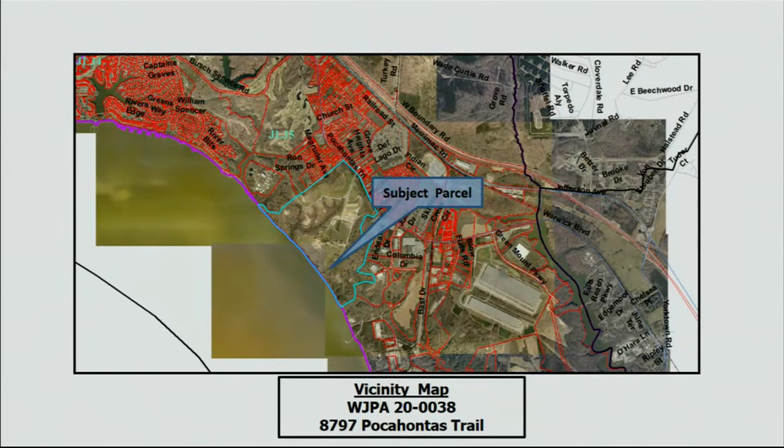Samuel Minkoff of Carter's Grove Associates, LLC, to construct a living shoreline consisting of 12 breakwaters, beach nourishment, backshore plantings, a revetment refurbishment, and a new revetment on property located at 8797 Pocahontas Trail in the Skiffs Creek watershed, as shown above. An aerial photograph of the site in question, right along this shoreline here, with the James River being the body of water it accompanies.

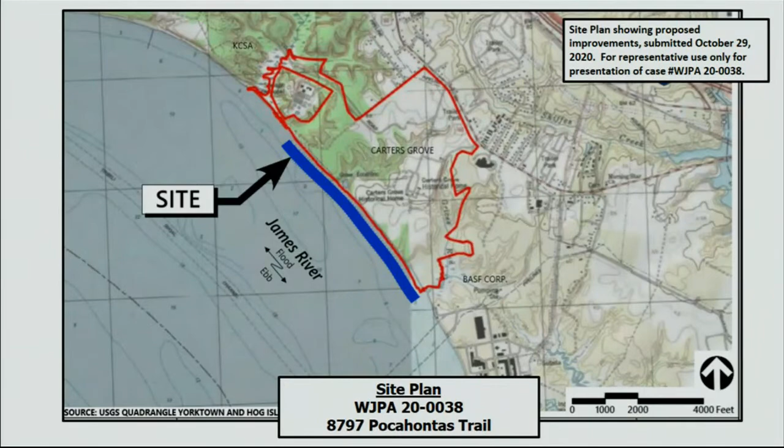Topography as it embodies the site, steep ravines and embankments along the shoreline, and a site plan showing the entirety of the work. The shoreline is characterized by heavily eroded banks caused by offshore wave action. Height of several of the bluffs are estimated at over 50 feet, consistent with Senate Bill 776, enacted on July 1st, 2020. The applicant is proposing a living shoreline approach to protect and restore the property. The project consists of 12 freestanding offshore armored stone breakwaters, as shown above.

A 78,000 cubic yards of sand fill to create 108,754 square feet of sandy intertidal shoreline and 285,595 square feet of vegetated shoreline. Plantings are Spartina patens, salt meadow hay, planted on 18-inch centers.

Upstream from the plantation house is a series of 8 breakwaters, all 175 feet in length, while the downstream segment has two 206-foot, one 200-foot, and one 175-foot breakwaters.

The project also includes the installation of 2 new segments of riprap revetment, 660 feet and 387 feet, and refurbishment of an older revetment for approximately 1,380 feet. Total impacts to non-vegetated intertidal wetlands equates to 108,500 square feet and 240,558 square feet of subaqueous impacts.

The project also includes the installation of an open pile pier, timber pier, 8 feet wide by 832 feet long, and a covered boat lift. The pier crosses non-vegetated wetlands and open water. Both the pier and boat lift are outside the Wetlands Board's jurisdiction.

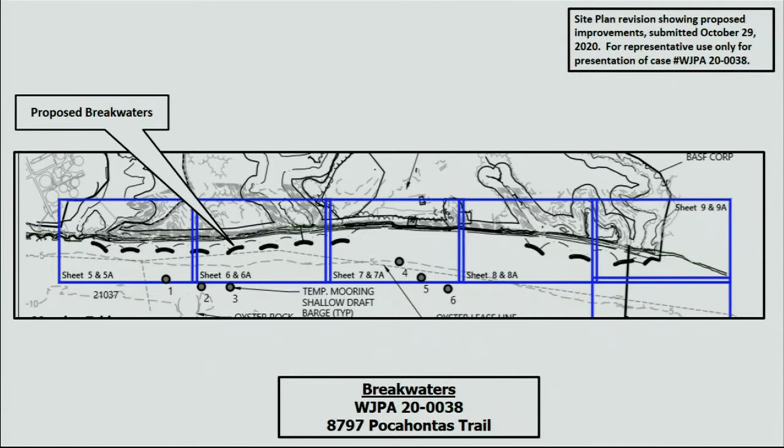In addition, a failed concrete drainage channel located in the center of the existing revetment will be replaced with a pipe outfall, and a failing spillway from a freshwater pond adjacent to the shoreline will be replaced with a spill box and emergency spillway. Above shows a cross-section of the breakwaters being proposed.

A more detailed drawing of the impacted areas shows the revetments here in green, the breakwaters here in yellow, and the sand fill behind the breakwaters here in blue.

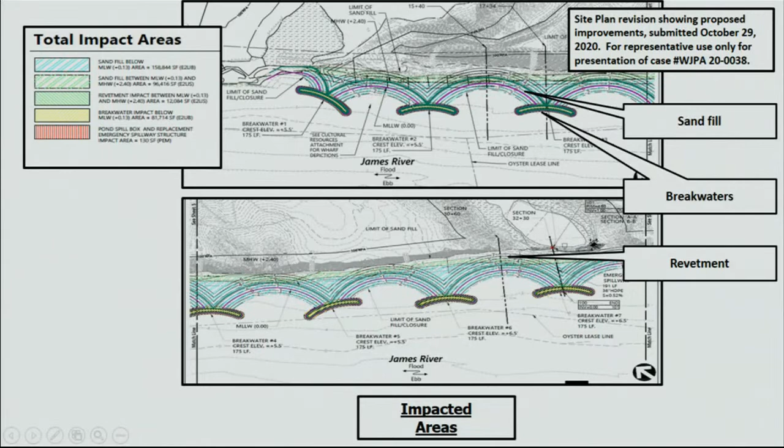The resulting habitat, as it will be affected and that will come of this project, is outlined here in red and blue.

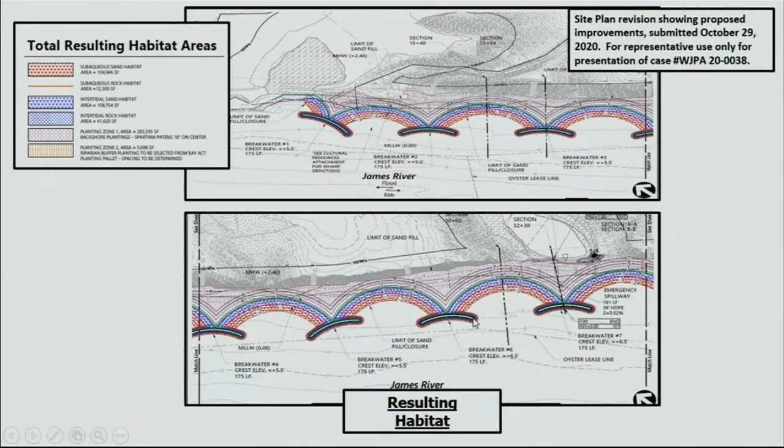As published in the Virginia Register on July 11th, 2005, the revised Wetland Mitigation Compensation Policy and Supplemental Guidelines, Regulation 4 VAC 20-390-10: Virginia, as a Chesapeake Bay program partner, is committed to achieve a no net loss of existing wetland acreage and function according to the program partner's signatories' regulatory programs.

In order for a proposed project to be authorized to impact wetlands and compensate for the wetland loss in some prescribed manner, the following 3 criteria must be met: all reasonable mitigative efforts, including alternative siting which would eliminate or minimize wetland loss or disturbance, must be incorporated in the proposal; the proposal must clearly be water dependent in nature; and the proposal must demonstrate clearly its need to be in the wetlands and its overwhelming public and private benefits.

Staff has reviewed this application and finds that this project does meet all 3 of the criteria as outlined above.

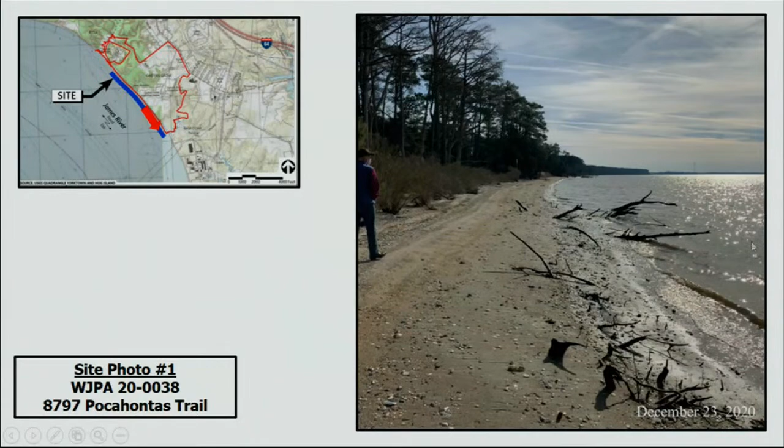Some staff photographs above show the area in question, with breakwaters here in the water and the backfill of sand in this area. Some of the bluffs are eroding, and the applicant is trying to protect them.

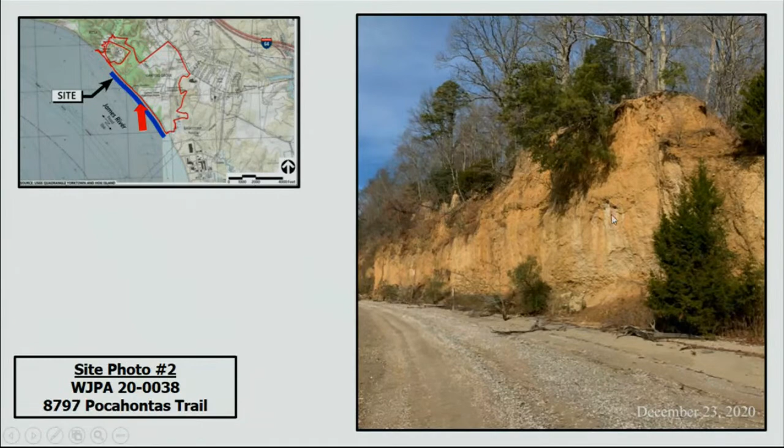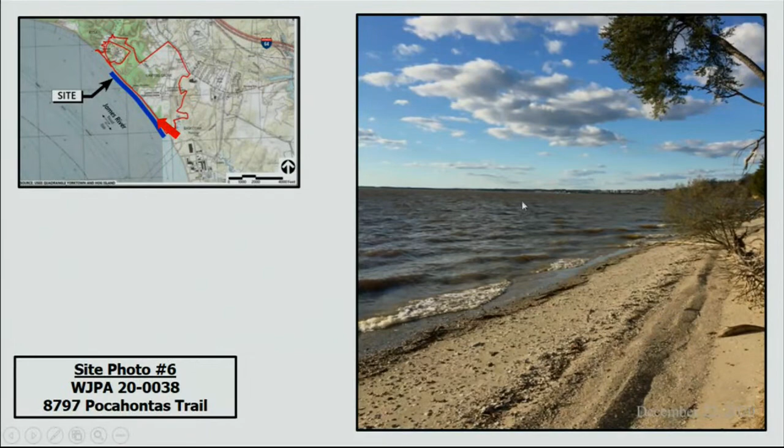Again, the breakwaters being proposed constructed out here in the water, and a few photographs from the water looking in towards the project site.

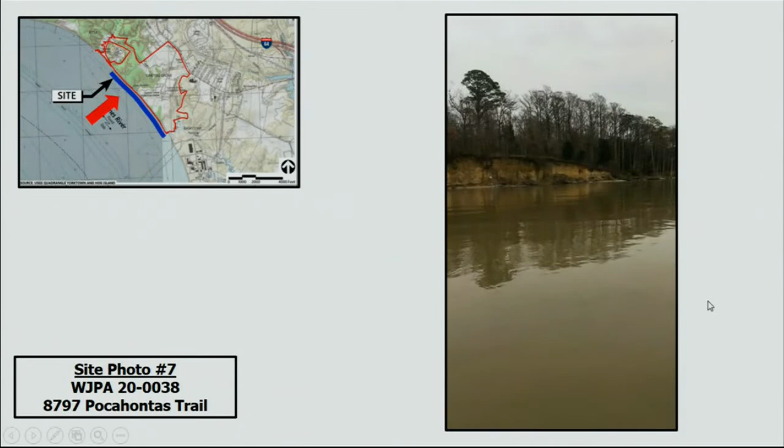Staff has reviewed the application above and recommends approval of this application as presented. Should the board wish to approve the application, staff suggests the following conditions be incorporated into the approval.

The applicant must obtain all other necessary local, state, and/or federal permits required for the project. All development activities located in the special flood hazard area shall comply with Article 6, Division 3, Floodplain Area Regulations of the James City County Zoning Ordinance, and receive all required approval and permits prior to commencement of such activities.

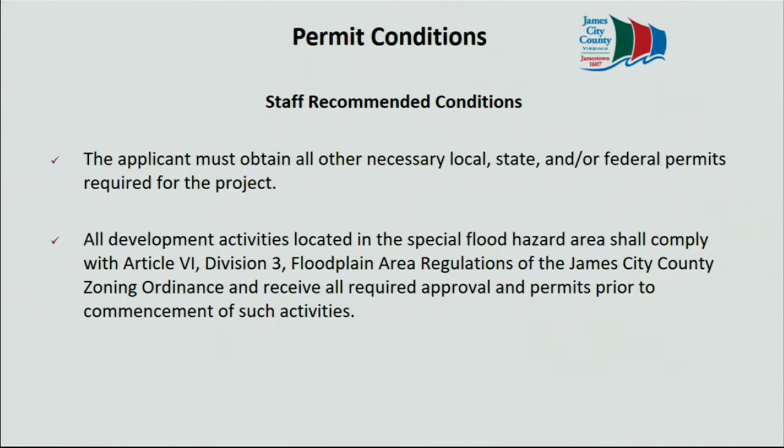The backshore planting area shall be planted with Spartina patens, approximately 285,600 square feet in area, with 2-inch plugs on an 18-inch spacing in a triangular pattern.

A surety in the amount of $20,000 shall be paid and in place prior to the commencement of work, in a form acceptable to the James City County Attorney's Office.

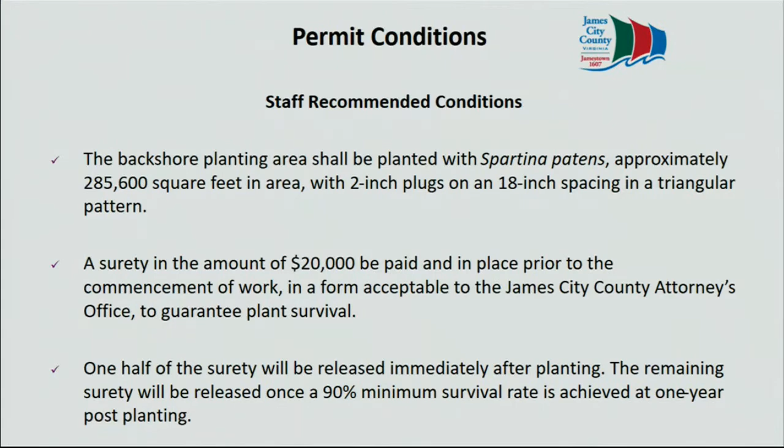One half of the surety will be released immediately after planting, with the remaining surety to be released once a 90% minimum survival rate is achieved at 1 year post-planting.

This wetlands permit for this project shall expire on January 13th, 2022 if construction is not begun, and if extensions to this project are needed, a written request shall be submitted to the Stormwater and Resource Protection Division no later than December 2nd, 2021, which is 6 weeks prior to the expiration date of this permit.

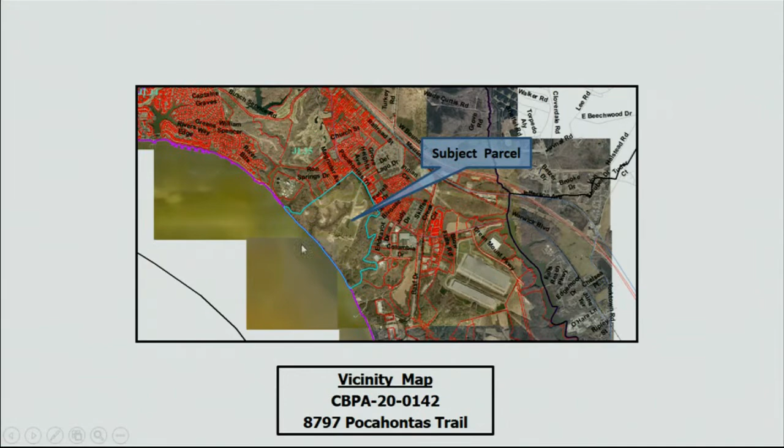Mr. Anthony Lobier of VHB has applied for a Chesapeake Bay exception on behalf of Carter's Grove Associates, LLC, for encroachments into the RPA buffer for the regrading of a ravine, regrading of a shoreline, and the installation of outfall pipes and spillway on property located at 8797 Pocahontas Trail within the Skiffs Creek watershed. As outlined above in the vicinity map, the proposed project site is within the Skiffs Creek watershed along the James River, and here is the approximate location of the proposed project.

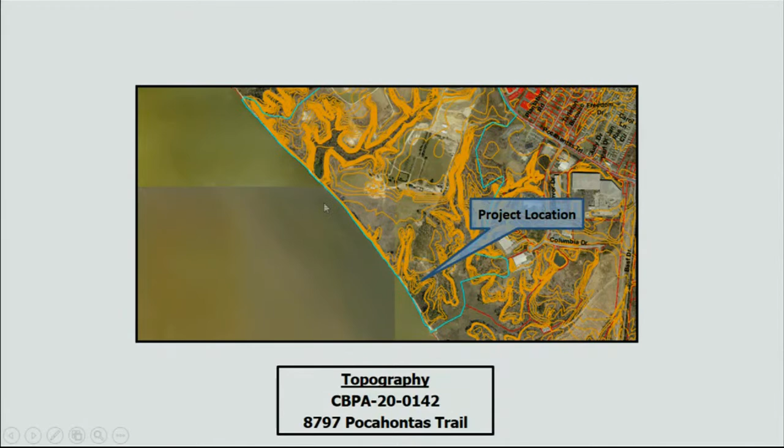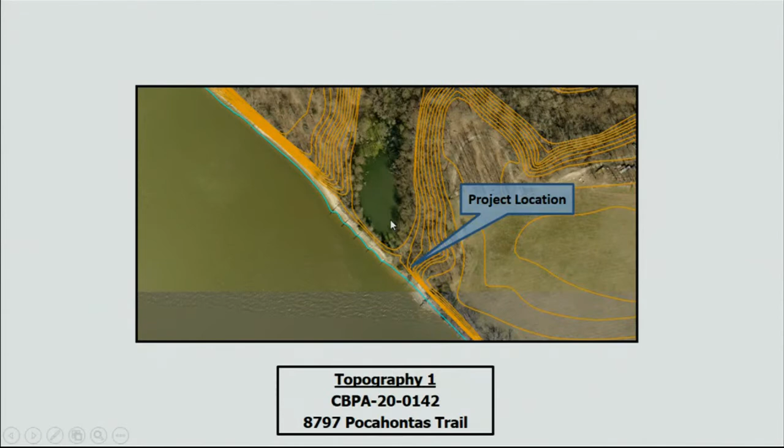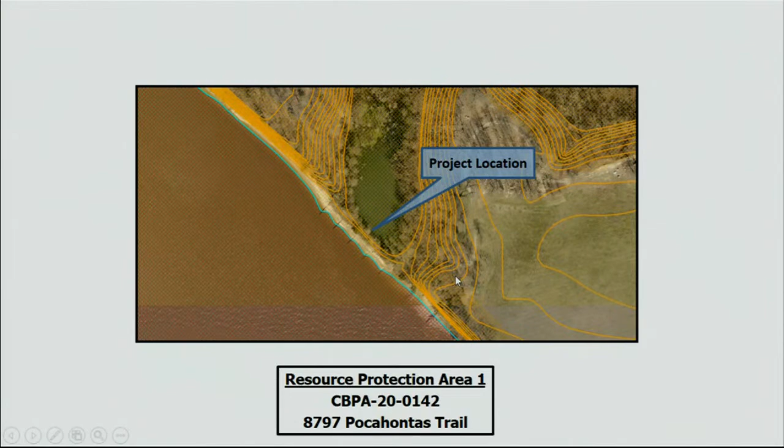Total area involved with this portion of the project equals approximately 15 acres, of which 100% is located within the RPA. The application request is in conjunction with the Wetlands Permit Request, WJPA 20-0038, to protect the James River shoreline bordering this property. The applicant is proposing to regrade the shoreline and a ravine and to install outfall pipes and a spillway to an existing pond. Limits of work are proposed in 3 separate locations and is proposed to run concurrently with the shoreline stabilization projects proposed in WJPA 20-0038.

There are 2 outfall pipes associated with this proposal. One outfall pipe is proposed in a degrading ravine currently transporting runoff towards the resource. The second outfall pipe is associated with an existing pond on site.

Total impacts associated with the proposed project equal 5,182 square feet of impacts to the landward 50-foot RPA and 240,857 square feet of impacts to the seaward 50-foot RPA. Total impervious impacts to the RPA associated with the installation of the pipes and spillway equal 541 square feet. There are also 22,075 square feet of steep slopes proposed to be impacted within this project.

Required mitigation for this amount of impervious cover impact to the RPA equals 1 planting unit, equaling 1 canopy tree, 2 understory trees, and 3 shrubs. However, the entire disturbed area within the RPA must be revegetated with 3 trophic layers—canopy, understory, and shrub—per the ordinance. While no mitigation plan has been submitted at this point, the applicant has expressed intentions of planting in excess of the required mitigation plantings. The applicant must coordinate with the Virginia Department of Forestry for this restoration effort.

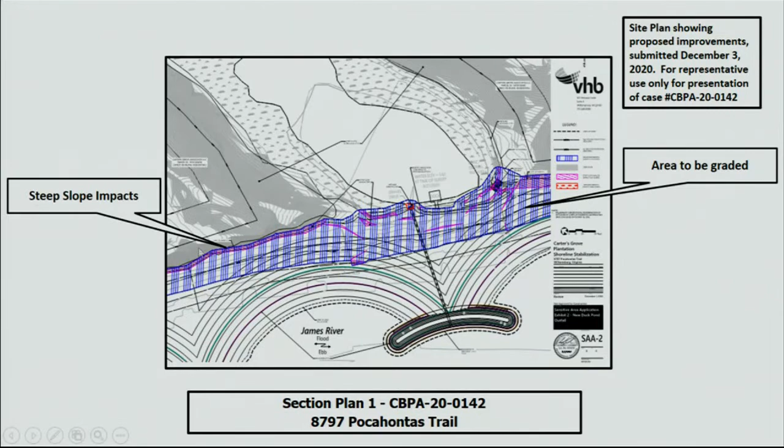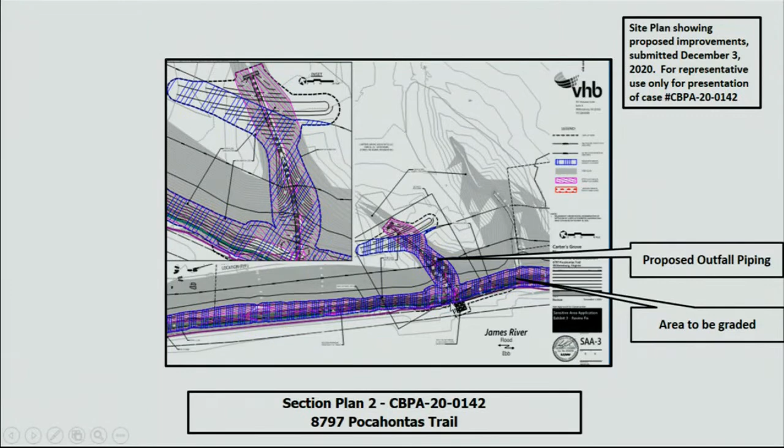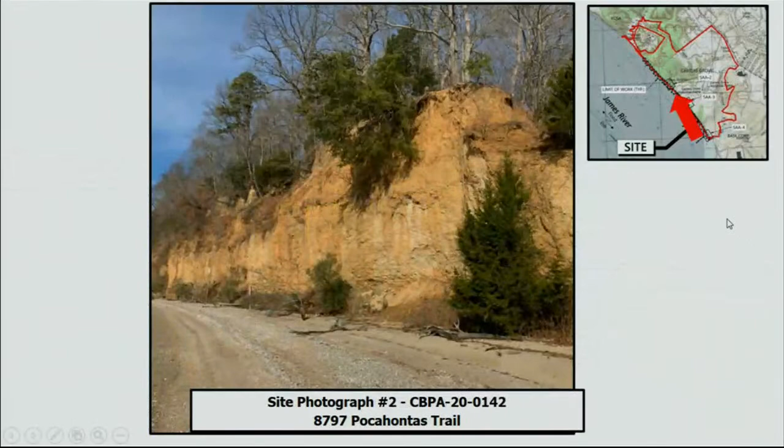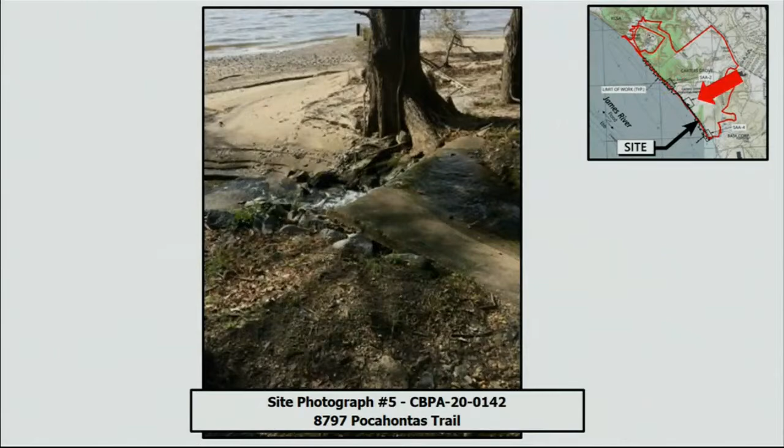Picture showing this from the top view down towards the river, the steepness of the embankments.

Staff's view of this application is that it meets all 5 of the conditions presented in the ordinance. Should the board also find the exception request meets all 5 of the conditions, staff suggests the following conditions be incorporated into the approval.

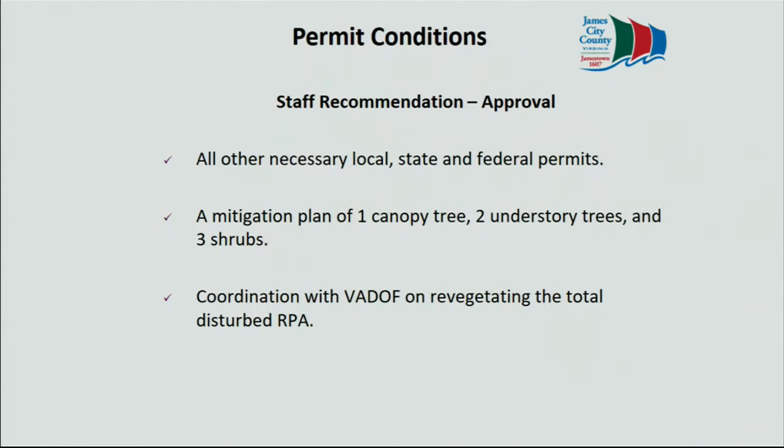The applicant must obtain all other necessary federal, state, and local permits as required for this project, specifically an erosion and sediment control plan and a land disturbance permit. A mitigation plan consisting of 1 canopy tree, 2 understory trees, and 3 shrubs be submitted to the Stormwater and Resource Protection Division, with coordination with the Virginia Department of Forestry on revegetating the total disturbed area, buffer restoration, and trees and shrubs suitable to that location.

That a surety of $20,000 be submitted in a form acceptable to the James City County Attorney's Office to guarantee required plantings of the RPA buffer restoration, and that this exception request approval shall become null and void if construction has not begun by January 13th, 2022, with written requests for an extension submitted to the Stormwater and Resource Protection Division no later than December 2nd, 2021, just 6 weeks prior to the expiration date.

Thank you. I'd be happy to answer any questions the board may have at this time.

Any questions for staff? I have none. Mr. Gussman? No questions. Thank you.

Then I'd like to open the public hearing. Would the applicant care to comment on the application? Neville Reynolds, 5561 Down Creek Road, the agent for Mr. Menkoff and Carter's Grove Associates LLC.

We're in agreement with staff recommendations, and I'm happy to answer any questions.

Gussman: No questions. Just curious, are you able to use any of the bank material for fill for the beach portion? No, in fact, just for clarification, the only bank grading that really is occurring is where the boat dock makes landfall. I think the grading that was referred to in the drawings by staff is really the sand fill that is placed in the RPA but butts up against the embankment.

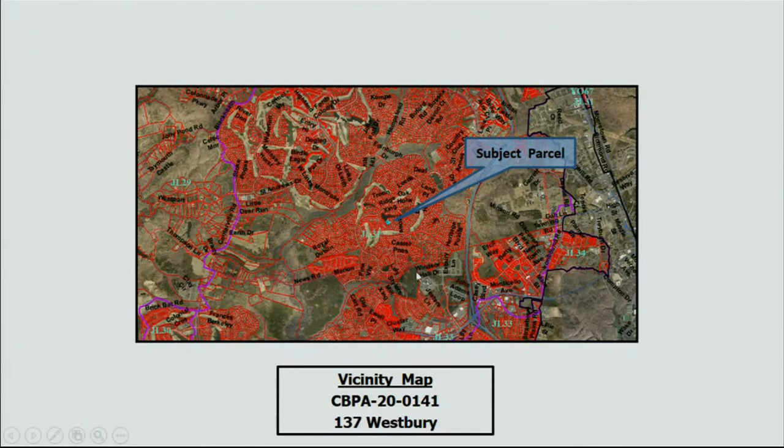The vicinity map here shows the property outlined here, and it backs right up to one of the ponds that's within the Ford's Colony subdivision. Pond is shown here. RPA is based off of the edge of the topography of the site, sloping from the cul-de-sac at Westbury all the way down to the pond.

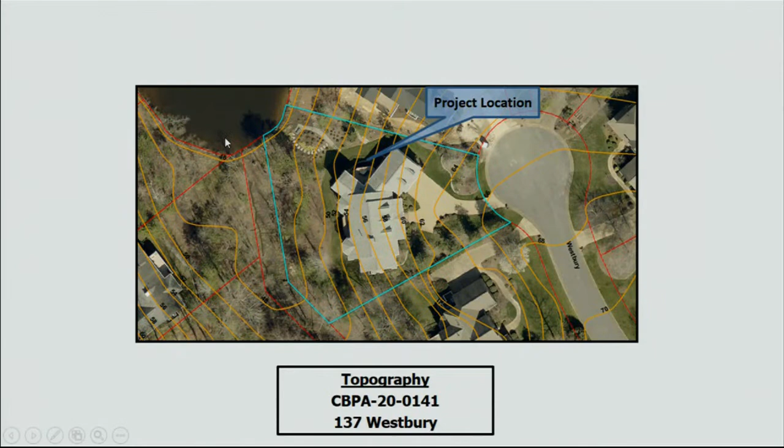There is a sanitary sewer out there. It runs along the property, edge of the pond. RPA as it affects this property borders the house, existing house structures in the RPA. There's a wetland system that comes up this way and affects this part of the property as well.

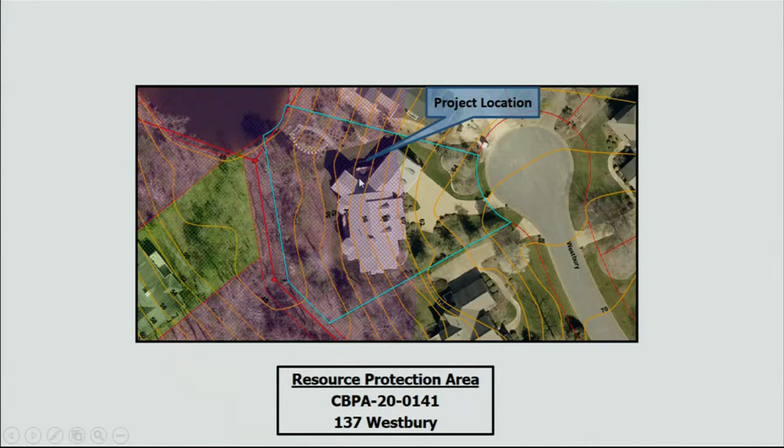A couple photographs of the site. When the original deck was constructed, it was constructed with a 45-degree angle, and the applicants are proposing to square that off and make the deck more usable for them.

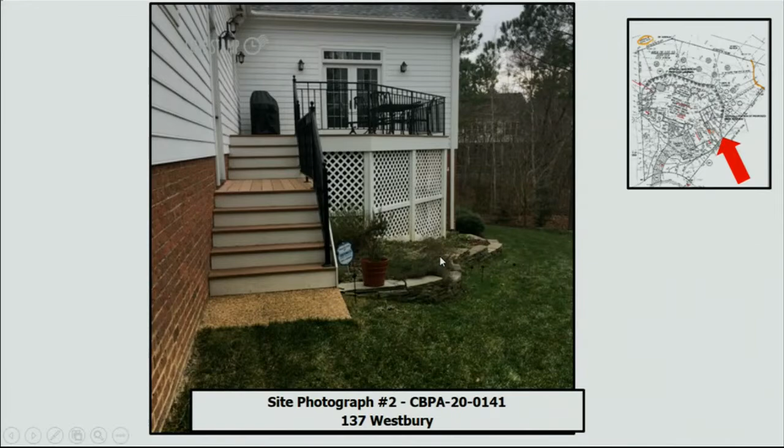All of that. Staff has evaluated this application and the exception request for the construction of this deck extension. It feels that the exception does meet the conditions outlined in the ordinance and should be heard before the board because the deck is accessory in nature.

The board may grant exceptions to Section 23(7) if the application meets the following 5 conditions: that the exception request is the minimum necessary to afford relief, that granting the exception will not confer upon the applicants any special privileges denied by Chapter 23 Chesapeake Bay Preservation of the James City County Code to other property owners similarly situated in the vicinity. The exception request will be in harmony with the purpose and intent of Chapter 23 of the James City County Code and is not of substantial detriment to water quality.

The exception request is not based on conditions or circumstances that are self-created or self-imposed, nor does the request arise from conditions or circumstances either permitted or non-conforming that are related to adjacent parcels, and that reasonable and appropriate conditions are imposed which will prevent the exception request from causing a degradation of water quality.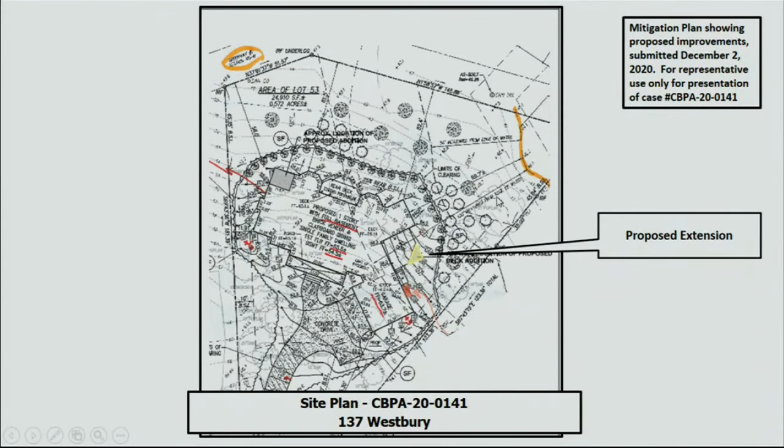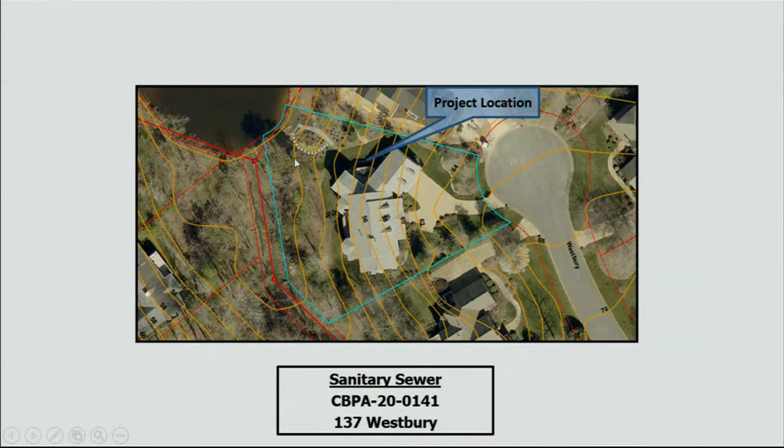I was remiss in outlining their mitigation proposal. Look at the aerial photograph. This entire portion of the property is in a planting bed, and the applicants have proposed to add additional shrubs in this area that would survive those wet conditions.

Staff is in agreement that the application does meet all 5 of the conditions that I outlined, and it is approvable.

Should the board also find that the exception request meets all 5 of the conditions above, staff does suggest the following conditions be incorporated into that approval: that the applicant obtain any other necessary federal, state, and local permits as required for the project. This would entail building permits.

The mitigation plan consisting of 3 shrubs be submitted to the Stormwater and Resource Protection Division. That a surety of $250 be submitted in a form acceptable to the county attorney's office to guarantee the plantings.

That the exception request approval shall become null and void if construction is not begun by January 13th, 2022, and the written request for extension should be submitted to our office no later than December 2nd, 2021.

I'd be happy to answer any questions the board may have regarding this application. Questions for staff? Mr. Gussman? No questions.

I'd like to open the public hearing. Would the applicant care to address the board?

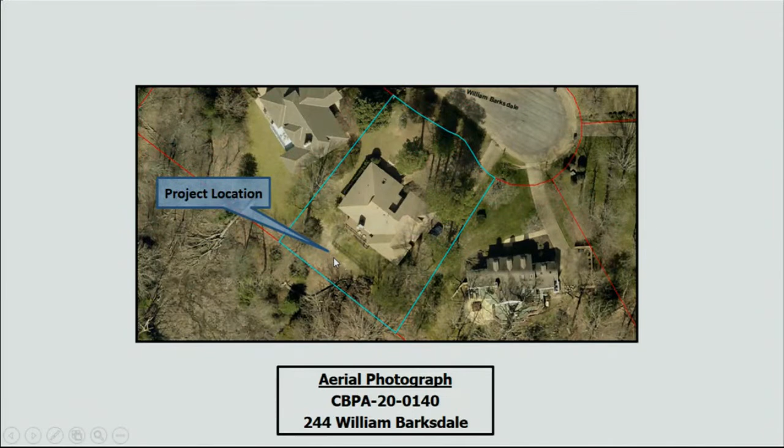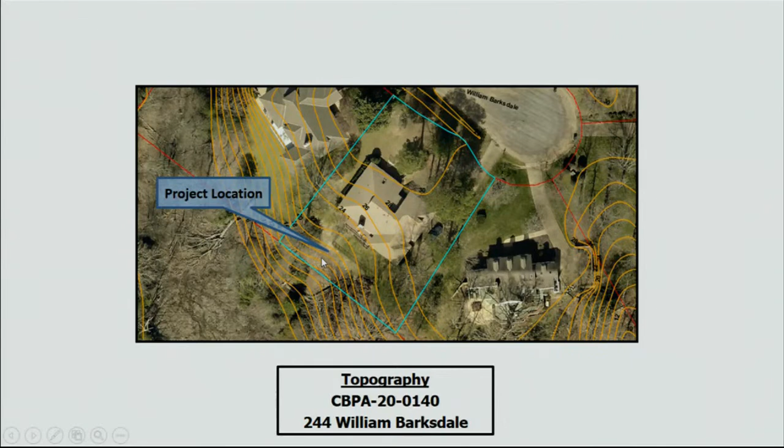Barksdale is in the Kings Mill subdivision, located here, right close to the James Colonial Parkway. Project location in the back of the property. Topography of the site, sloping from the cul-de-sac down to the ravine here at the left of this photograph, and the slopes are steep and eroding in this area.

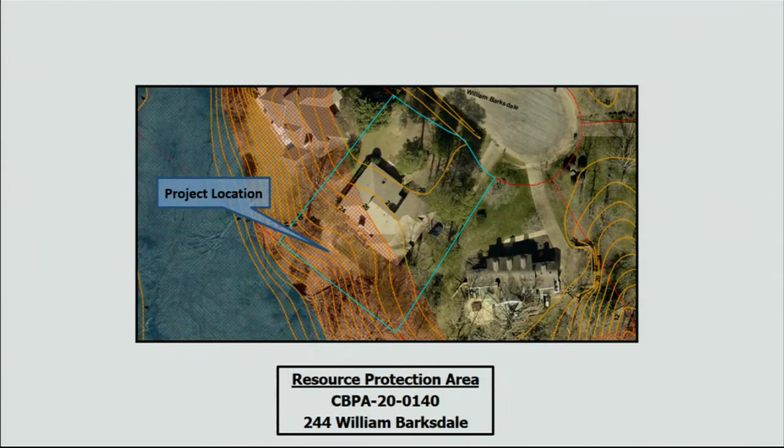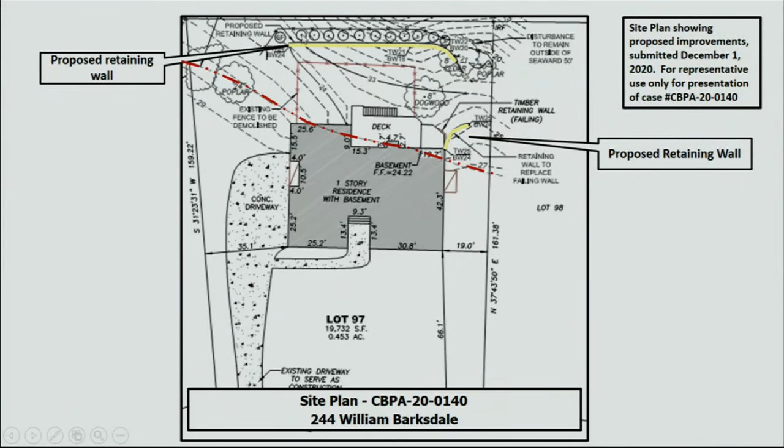From the site plan, they are proposing 2 retaining walls - one here, the first one in the back, and the second one on the side of the house, a smaller wall. Then for mitigation, they're proposing 11 shrubs below the long retaining wall at the rear of the 100-foot RPA buffer as it affects this property.

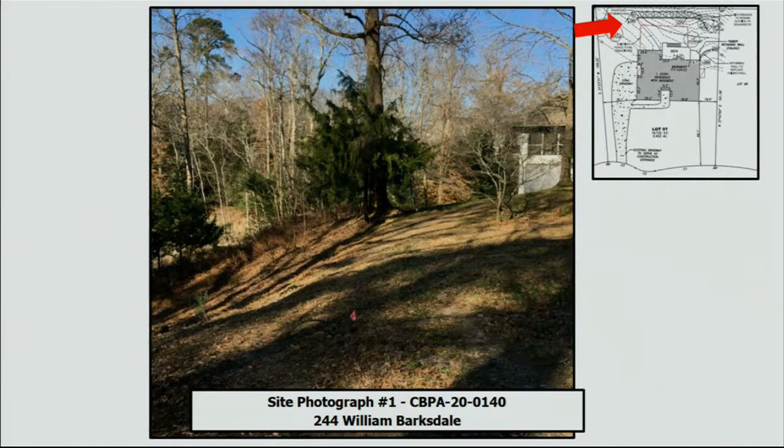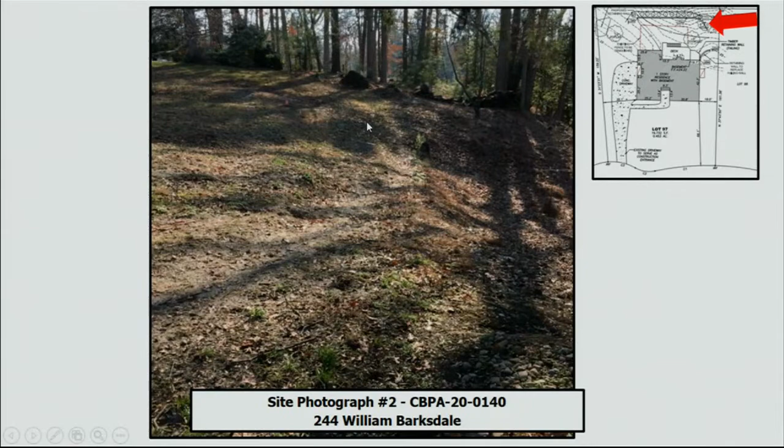A couple photographs from the site. Looking from the left-hand side of the property, the wetlands off to the left, you can see the steep slope nature of the property there. On the other side of the property, retaining wall in this location, mitigation plantings down here.

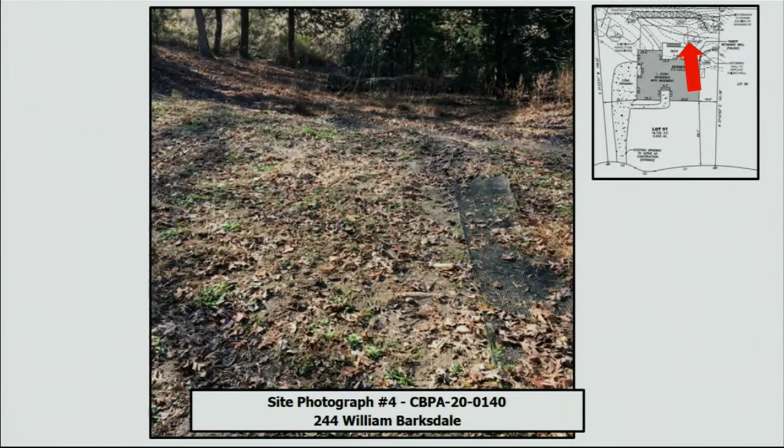From the house looking back towards where the retaining wall would be built, and the smaller wall up at the house in this location here.

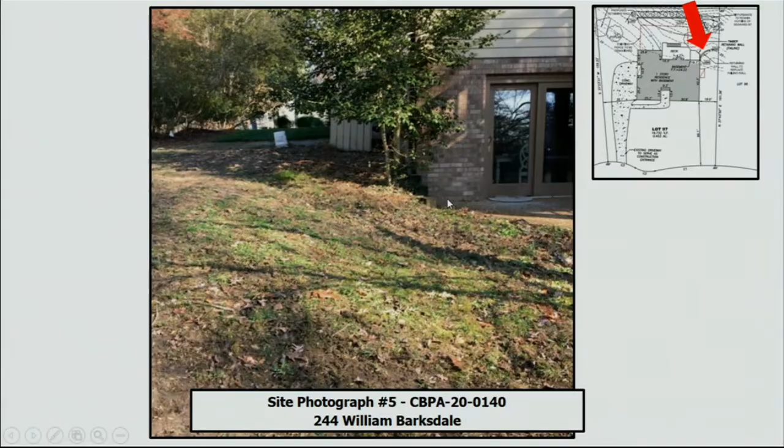Staff evaluated this application and the exception request for the construction of these 2 retaining walls and feels that it meets the ordinance conditions in 23.11 and 23.14, and should be heard before the board because the retaining walls are accessory in nature. The board may grant exceptions to 23.7 of the code if the application meets the following 5 conditions.

The exception request is the minimum necessary to afford relief; granting the exception will not confer upon the applicant any special privileges denied to others under the chapter; the exception request will be in harmony and purpose with the Chesapeake Bay Ordinance, Chapter 23 of the Code, and is not of substantial detriment to water quality; the exception request is not based on conditions or circumstances that are self-created or self-imposed; and that reasonable and appropriate conditions are imposed which will prevent the exception request from causing a degradation of water quality.

Staff's view is that it does meet all 5 of those conditions as presented and is approvable. Should the board also find the exception request meets all 5 of those conditions, staff suggests the following conditions be incorporated into that approval.

That the applicant obtain any other necessary federal, state, and local permits as required for the project, including a James City County building permit. That a surety of $250 be paid and in place prior to commencement of work, in a form acceptable to the James City County Attorney's Office, for the planting mitigation, which again is 11 shrubs.

This is a stacked block wall? Yes. And then the wall up near the house is basically replacing the timber wall that's up there that's failing. It seemed logical to go ahead and replace that little wall.

The mitigation, we're going to do 11 shrubs down below the wall. That seems to work pretty well, and that will stabilize the ground below the wall. We found that works very well—a simple design, but it seemed that's usually what works.

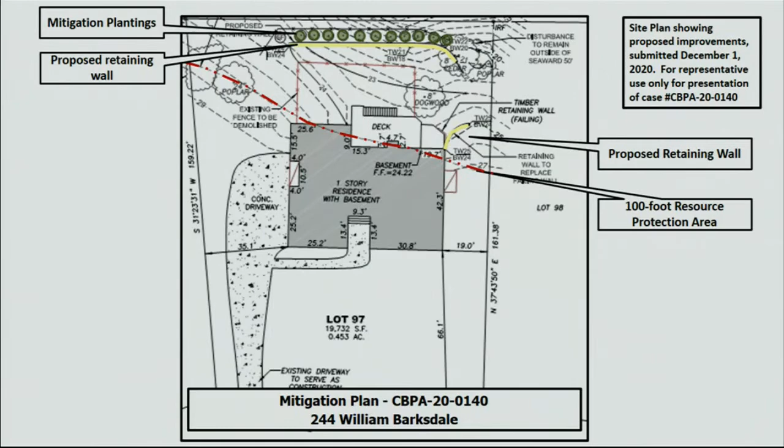Any other questions for the applicant? How is that retaining wall going to be? It's only going to be about a 4-foot wall. Going to have still a slope? There will still be a slope coming down the hillside, and they'll restabilize the hill and grass just like it is now.

Provisions for catching that water, or is it going over? It'll be gravel behind the wall, so a lot of it will infiltrate behind the wall and go down there, coming out the weep holes at the bottom for anything that doesn't continue to infiltrate straight down. When we were out there, we did a couple soil augers—it's a pretty sandy loam material, so it's got a good chance of doing some pretty good infiltration there, still well above the groundwater table down toward College Creek.

Mr. Gussman, Mr. Lukens, any questions of the applicant? No questions. Thank you. Would anybody else care to comment on this application? Michael Hoyt, Barksdale—I'm a homeowner here with Catherine, just here to answer any questions you might have. Any questions for the applicant? Very good, thank you for coming.

If there are no other comments, I will close the public hearing. Board discussion.

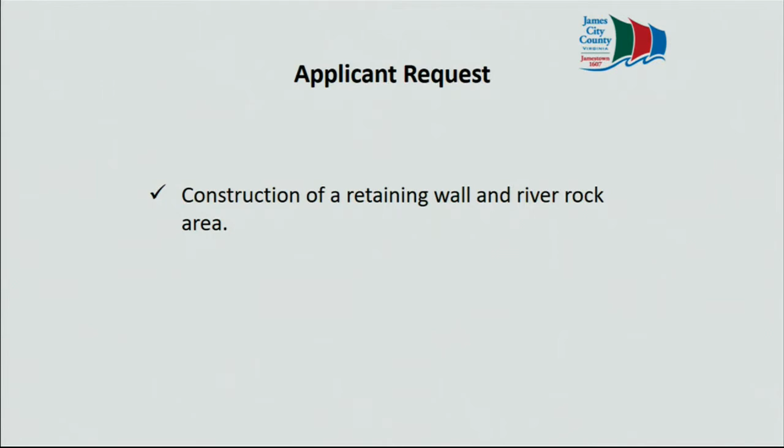Chair, members of the board, again, Mike Wilson here to present case CBPA 20-0100, Mr. Emmanuel Greenspan at 5520 North Mallard Run, and Mr. Aaron Williams of Williams Landscape Design as well. He is proposing the construction of a retaining wall and then a river rock area to address erosion of his property.

His property is located in the Mallard Hill subdivision, off the main entrance into the Warhill District Park off Longhill Road. If you're familiar with that, going into the park, there's a subdivision off to the right—these are the soccer fields, the complex is up here, and the county football Warhill Stadium is up there. In the aerial photograph, the project location is in this general area here.

Topography of the site: a high point near the cul-de-sac at the bottom of the page, then deeply sloping down towards the Powhatan Creek floodplain. The floodplain is shown here—it is a designated floodway, and it shows up on the FEMA maps. The elevation of that floodplain is approximately 43 feet mean sea level, shown in this green area here.

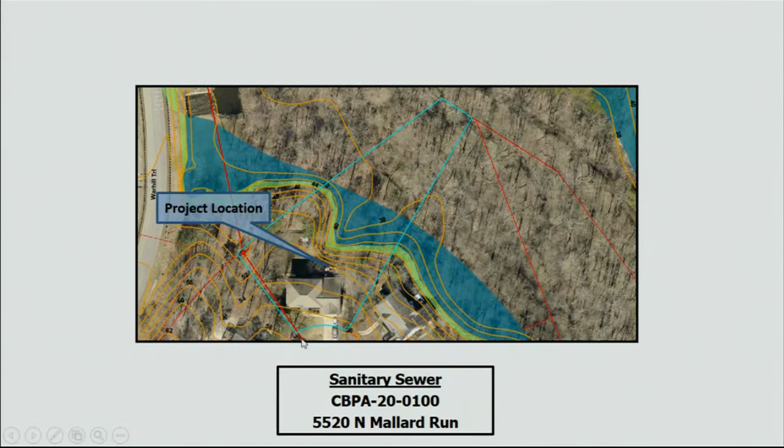Sanitary sewers that affect the property, but not the project, shown in this location, and then cutting across, going up into the Warhill Sports Complex. RPA as it affects this property.

The amount of impervious cover proposed with the construction of the retaining wall in the river rock area is approximately 693 square feet. The property was platted in 1991, after the adoption of the Chesapeake Bay Ordinance, but prior to the 2004 revisions.

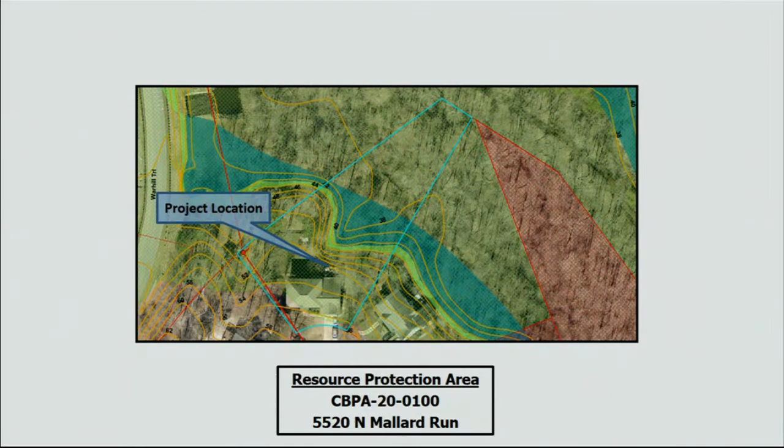There is erosion occurring on the back half of the property in this area. For that reason, the applicant is proposing a retaining wall as shown on the site plan. They're also proposing to fill the area between the house and the retaining wall with river rock in order to provide further stabilization, as shown.

Total impacts to the RPA are just less than 700 square feet, at 693 square feet. The required mitigation for this amount of impervious cover equals 2 mitigation units, which is 2 canopy trees, 4 understory trees, and 6 shrubs.

The mitigation plan is proposed downstream of the retaining wall, similar to the last project. Staff has evaluated this application and the exception request for construction of the retaining wall and the river rock area. The application does meet the ordinance conditions in sections 23.11 and 23.14 and should be heard by the board because the retaining wall and river rock area are considered accessory in nature.

The board may grant exceptions to 23.7 of the James City County Code if the application meets the following 5 conditions: that the exception request is the minimum necessary to afford relief; that granting the exception will not confer upon the applicant any special privileges denied by Chapter 23 to other property owners; that the exception request will be in harmony with the purpose and intent of Chapter 23 and is not a substantial detriment to water quality;

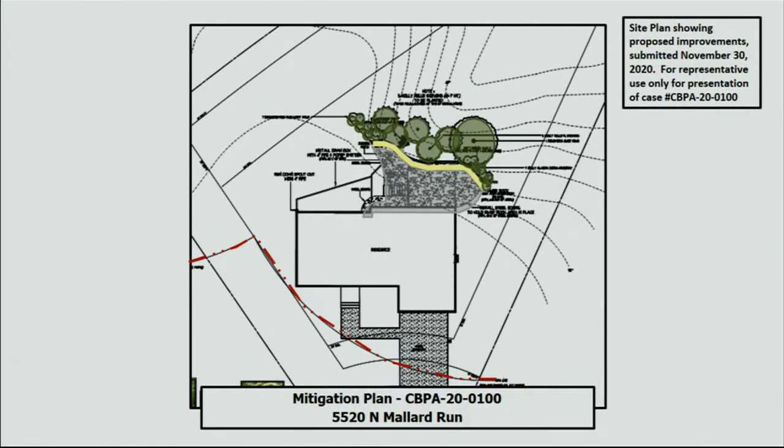that the exception request is not based on conditions or circumstances that are self-created or self-imposed, nor does the request arise from conditions or circumstances either permitted or non-conforming related to adjacent parcels; and that reasonable and appropriate conditions are imposed which will prevent the exception request from causing a degradation of water quality. Staff does feel that it meets all 5 of those conditions and recommends approval.

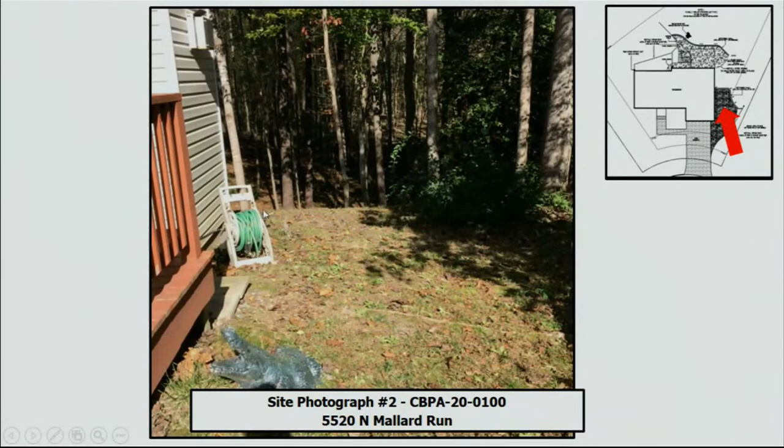A couple of site photographs of the area. This is off to the left here, that is the Powhatan Creek floodway. The retaining wall is going to be in this area, and then this area would be... And the retaining wall is in the back of the house here. This would be part of the area proposed to be river rocked.

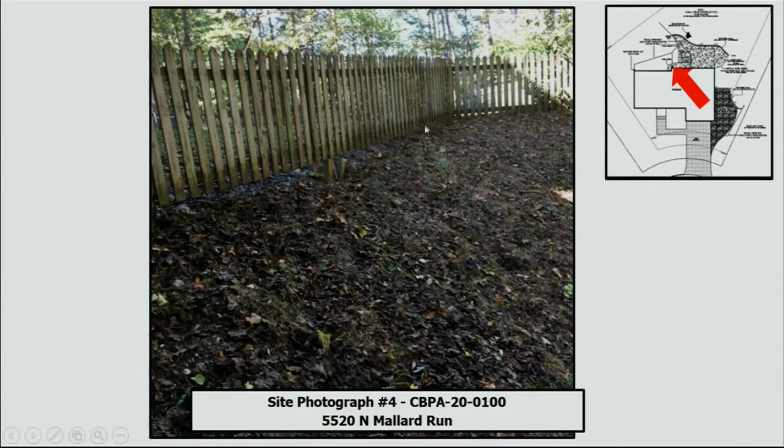Staff finds that this case is approvable, and should the board find that the exception request meets all 5 of the conditions previously mentioned, the following conditions be incorporated into that approval.

All other necessary local, state, and federal permits be obtained. This does require a James City County building permit; to date, they have applied for one. There are outstanding comments related to floodplain elevation location. The retaining wall, number 2, may not be built within the Powhatan Creek floodway as shown.

That a surety of $1,000 be paid and in place prior to the commencement of work, in a form acceptable to the James City County Attorney's Office. That the exception request become null and void if construction is not begun by January 13, 2022, and that written request for extension be submitted no later than December 2nd, 2021. Happy to answer any questions the board may have on the application.

Mr. Wilson, stop right there. Back up. So those are the pilings supporting the deck in the back? Correct. The approximate location of the retaining wall relative to the pilings? Just off the photograph. Is that a cantilever deck? I can't remember, I will let...

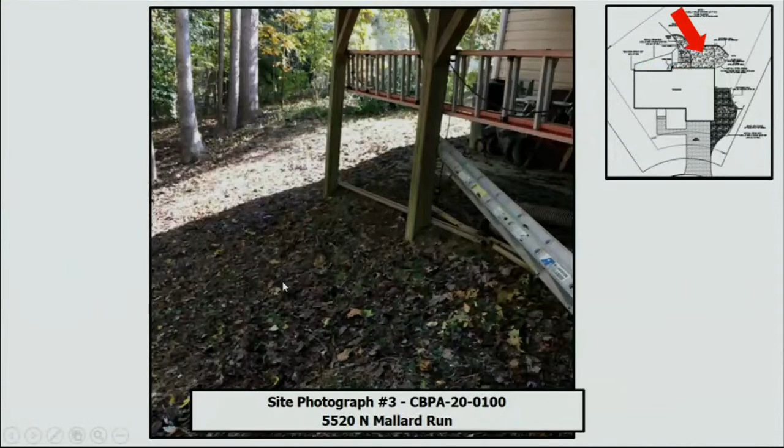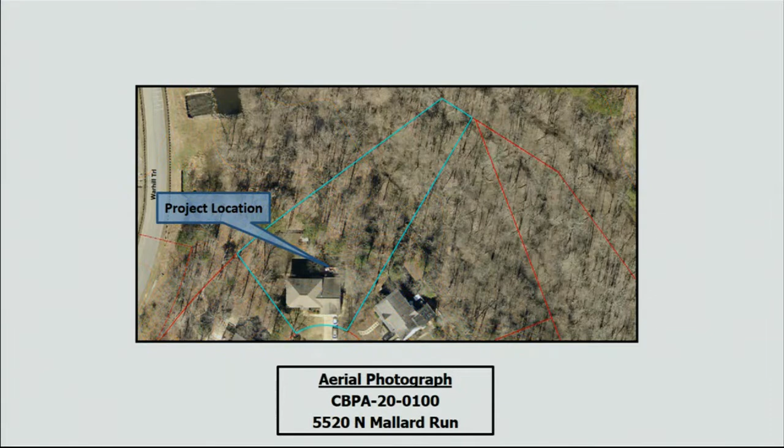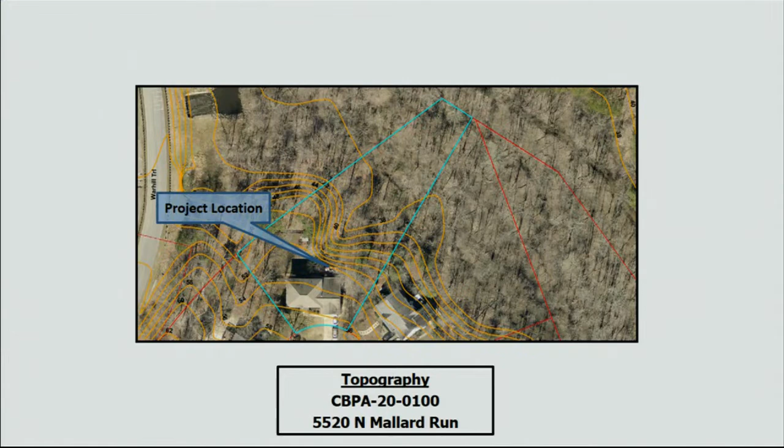One of the issues that our building permit and safety division is having is that the site plan that was submitted did not show any topography. From the FEMA map, the floodplain elevation is just less than 43, and these are 2-foot contour intervals.

So the floodplain elevation is roughly halfway between 42 and 44, shown there in green. So the deck is here, those trees we were looking at in that one photograph are here, and that retaining wall is going to be on the house side of those beech trees.

If I have that wrong, Mr. Williams will let me know. Any other questions from staff? Mr. Lukens and Mr. Gussman? No questions.

Questions here, Bob Lukens. I guess for clarification for me, the FEMA map area there showing the floodplain, does that represent a specific percentage of annual inundation?

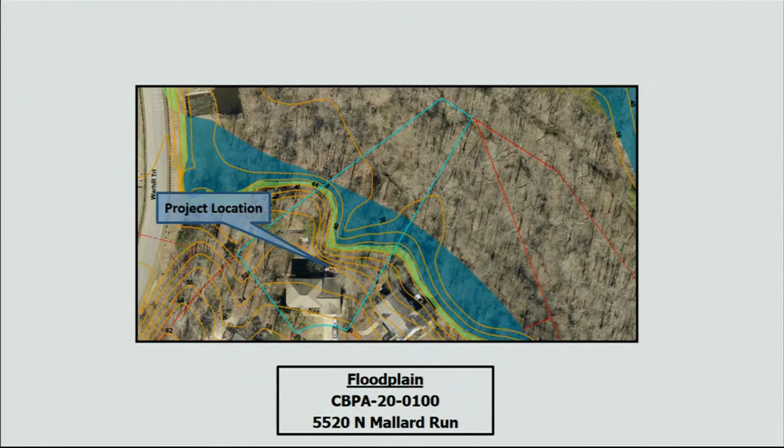Another question, the use of the river rock there, that will basically be a surface spread of a couple inches to slow down water flow ahead of the retaining wall. Yes, to slow down water, to allow it to infiltrate, and more importantly, to stop erosion that the applicant is currently experiencing.

This stabilization technique — the backyard is rather densely canopied. It's hard to tell at this time of year how much sunlight it gets in the summertime to grow healthy grass. But my suggestion to the board is there's not a lot of sunlight reaching the backyard in the summertime. That's why they're having difficulties getting grass to establish.

Very good. Any other questions of staff?

I'd like to open the public hearing for comments. Anyone wish to address the board?

Hi, my name is Aaron Williams. Can I take this off? Okay, thanks. Aaron Williams, representing Mr. Greenspan. I'm with Williams Landscaping.

Mike explained pretty much everything that I would have said, but I can answer any further questions. I noticed on your drawings that the location of the retaining wall in the vicinity of the deck appeared to be less than 5 feet off of the edge of the deck, closer to those pilings, unless the deck's cantilevered. Yeah, it is cantilevered. Okay. So our objective was to stay inside of or right at the footprint of the deck above, so that we don't go any further than has already been disturbed, but far enough away from the pilings so that we can put in the geogrid, which helps stabilize the wall.

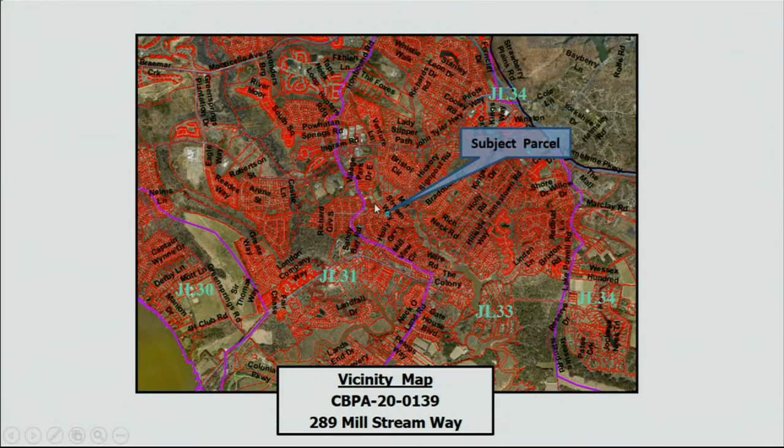The application again is for the construction of a patio, 2 retaining walls, a step with landing, and also a deck. The property is located in Millstream subdivision, right here, with Hickory Signpost Road right behind this property. Project location shown here. Topography as it affects this property — again, sloping from the street towards the rear of the property.

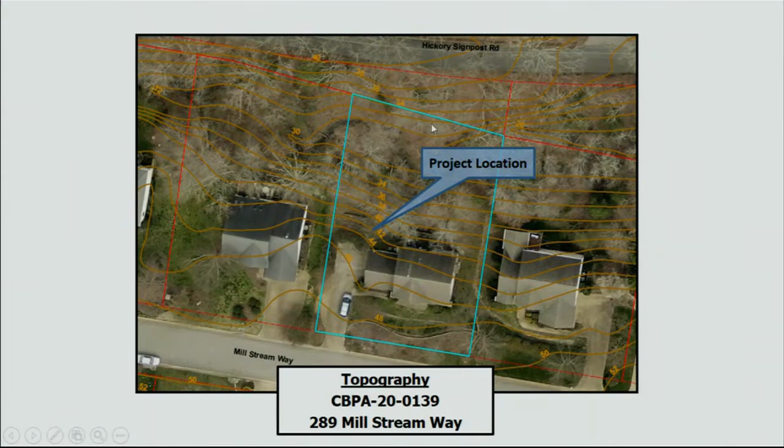If you remember, there is a live stream on the property at the rear. It's an RPA on the entire property. The parcel was platted in 1995, prior to the 2004 revisions, which is where this RPA is derived from. The amount of impervious cover that the Potters are now proposing is slightly less than 500 square feet, at 492 square feet.

In June of 2020, the applicants obtained an administrative exception to convert a deck into a house addition. A separate application was later submitted for the construction of a patio, 3 retaining walls, deck, and steps with landings. This application was deferred at the October 14, 2020 meeting to allow the applicant to adjust some things to the plan. The application was then heard at the November 11, 2020 meeting, where it was subsequently denied.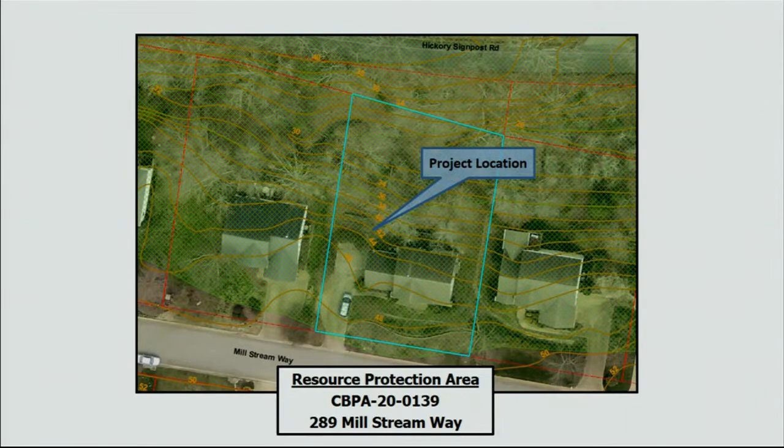The applicants have now amended that site plan to reduce the impervious cover impacts to the RPA. The proposal now includes the construction of a patio, 2 retaining walls, a deck, and steps, equaling approximately 492 square feet. The plan denied at the November meeting equaled approximately 830 square feet of impacts to the RPA. They have reduced it by roughly one-third of what they had proposed previously. From the November plan, this is what the proposal was.

Driveways here, there were steps and landings to get to a patio here, and then more steps and landings to get down to a lower level patio that was underneath a deck, which is shown here. Retaining wall here, and there were several retaining walls with the construction of the steps to help get down that slope. And then there was a long serpentine wall in this location.

Wanted to go through all of that for the benefit of those board members who weren't at the November meeting. And the stream was located roughly in that location.

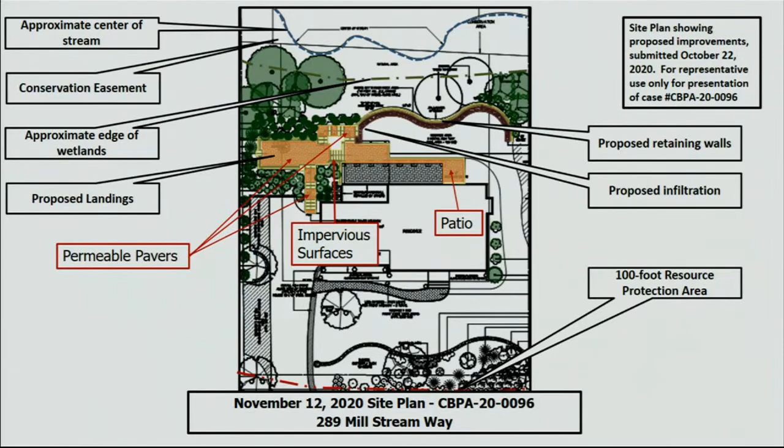New site plan, same basic concept. Steps coming down to a much smaller landing here, more steps down to the lower level landing here. This patio has been scaled back closer to the house and now is completely under the proposed deck. Want to point out to the board that in this location there's a sliding glass door of the basement to allow for egress from the basement.

While they have kept the serpentine shape of the rear yard, they're not proposing to fill it anymore. Unlike the November meeting, they have taken out that serpentine wall. Retaining wall in this location, and then there's some walls here associated with the steps and these landings.

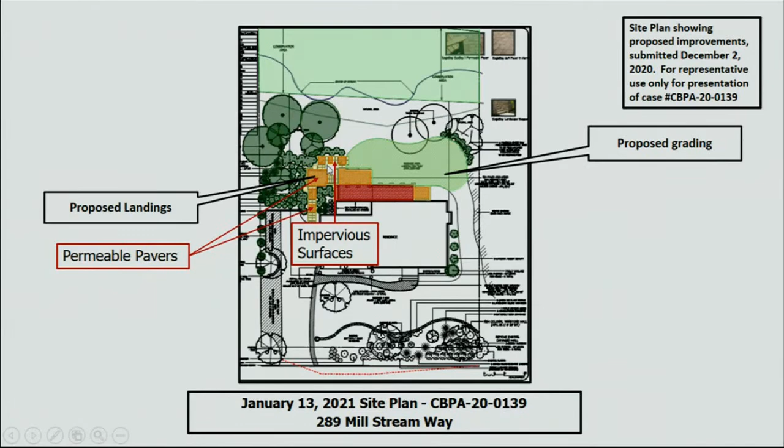The mitigation plan that was submitted - they are only required to have one planting unit, and they are proposing roughly five planting units of equivalent material, including some material over here. You can see a lot of shrubs and perennial grasses and understory trees in this location.

I just want to remind the board that everything in the front yard is also in the RPA, and they are proposing some additional driveway.

Couple site photographs. At staff's request, we had Mr. Williams go out and mark on the ground the location of the seawardmost location of the improvements, and you can see them here in the orange spray paint. Corner would be corner of landing here or patio here.

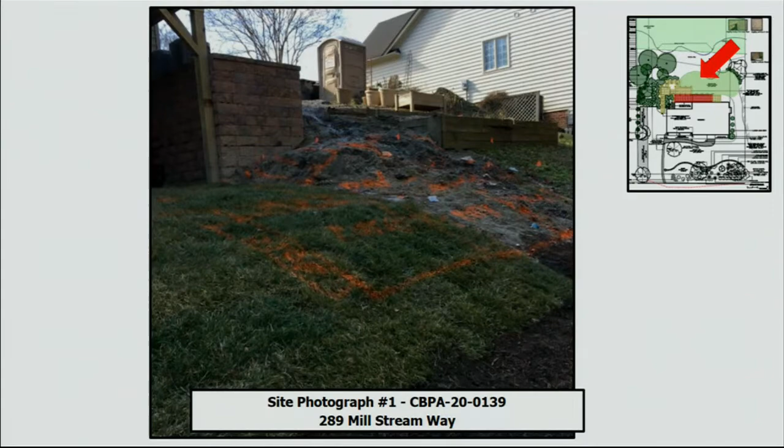Again, spray paint markings showing the seaward limit of this area. Steps will be coming down here, landing, more steps, and then you can see the new footers from the old deck where the house extension was. The new deck would be in this area.

I don't remember the exact width of the old deck, or I'm sorry, the proposed new deck. Mr. Williams.

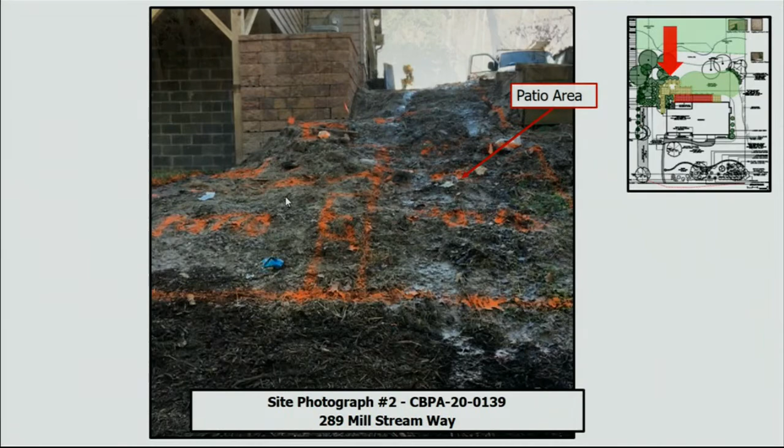From the top of the driveway, looking down, here are the heat pump units that had to be installed. Retaining wall. Steps would be going in this area here, and then this area off to the left, there's existing wood terrace boxes. Those would be removed.

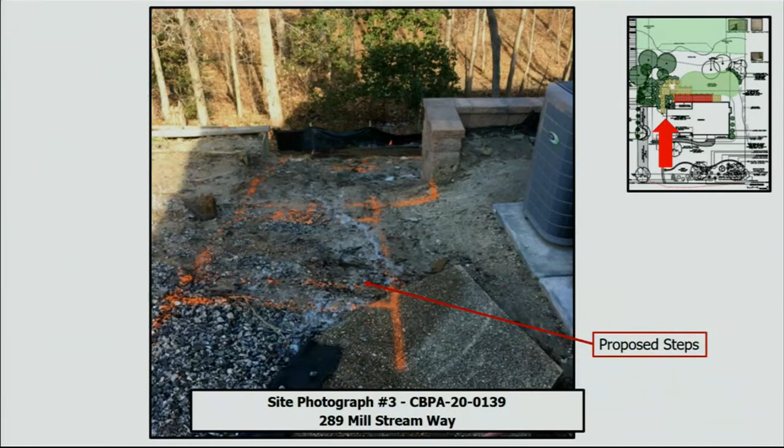They have stabilized with sod the entire backyard here. You can see roughly that's where the old serpentine wall was. They've now mulched that area. Some of that excess fill that was back there.

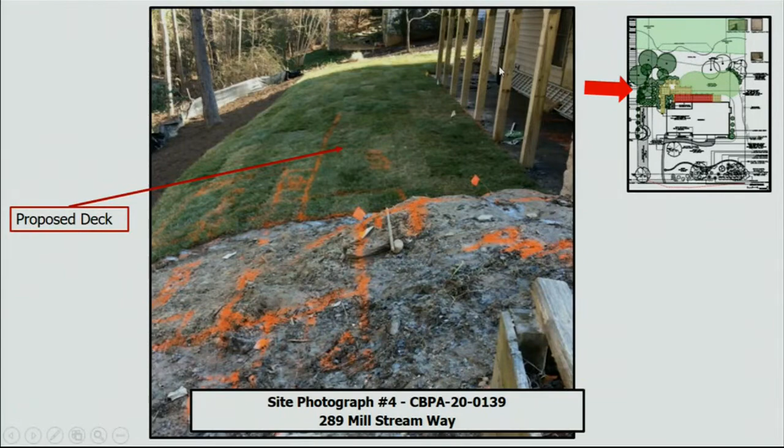The proposed deck is in this area here, and then it's going to have pavers under that, and then you can't quite see it, but the sliding glass doors are just to the left of this post here.

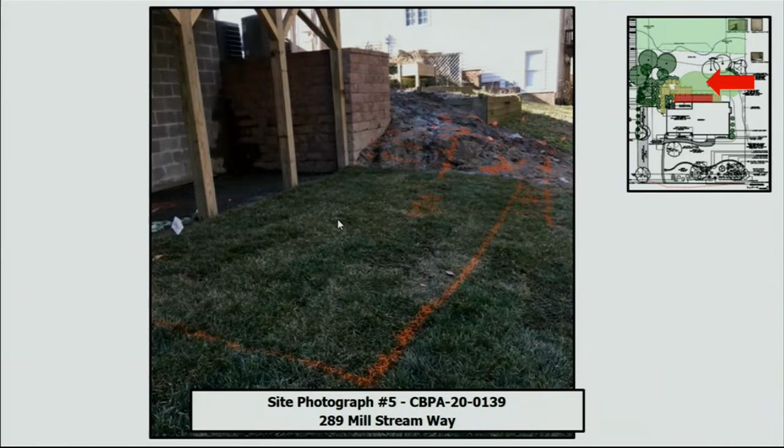Now looking back the other way, now looking down where the old serpentine wall was, across the rear of the backyard.

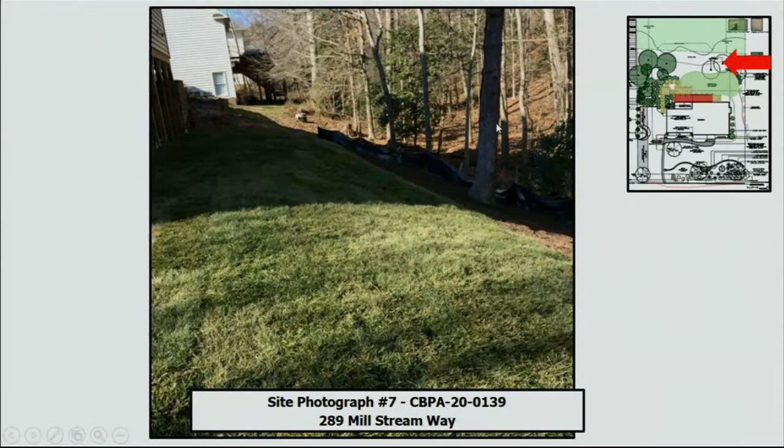Staff has evaluated this application and the exception request for this proposed construction of the patio, two retaining walls, decks and steps with paver landings. Feels that this does meet the ordinance conditions in sections 2311 and 2314 and should be heard by the board because those items are considered accessory in nature.

The board may grant exceptions to 23.7 of the ordinance if the application does meet the following five conditions: that the exception request is the minimum necessary to afford relief; that granting the exception will not confer upon the applicant any special privileges denied to other property owners similarly situated; that the exception request will be in harmony with the purpose and intent of the ordinance and is not of substantial detriment to water quality; that the exception request is not based on conditions or circumstances that are self-created or self-imposed; and that reasonable and appropriate conditions are imposed, which will prevent the exception request from causing a degradation of water quality.

Staff's view of this application is that it does meet all five of those conditions. The applicant has done a significant job in staff's opinion of minimizing the impacts to the RPA, and we do find that it is approvable.

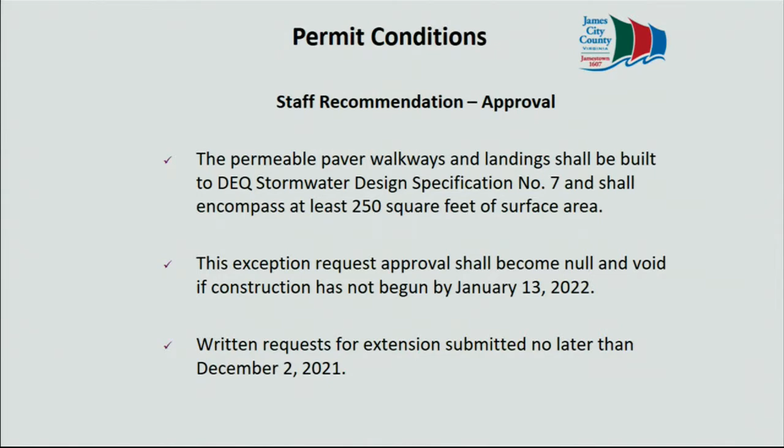That the turf love program be implemented on the property. That at least 250 square feet of the project's pavers be permeable paver design, meeting design specification number 7 of the current Department of Environmental Quality Stormwater Design specifications. That a surety of $500 be paid prior to commencement of work to guarantee required mitigation plantings. That the exception requests become null and void if construction is not begun by January 13, 2022, and written requests for extension be submitted to our office no later than December 2nd, 2021.

Be happy to answer any questions the board may have on this application.

Questions for staff? Mr. Lukens, Mr. Gussman? No questions. I'd like to say I'm glad you approved the locations of the heat pump. The pads and everything, good. Thank you.

I'd like to open the public hearing. Would the applicant like to address the board?

Again, Aaron Williams with Williams Landscape and Design, representing Kevin and Tammy Potter. Everything Mike said follows what I would tell you.

The only couple of quick things: the area in red, just so you guys understand, because the pictures don't really show it on that little drawing there, that's actually the house extension that was approved. So whatever's under that is already under roof, and the only additional decking would be that smaller rectangle. The question, I think, was how big is that, and I believe it's... The only other thing is the homeowners previously had a solid concrete walkway coming from the driveway down below, and that had to be removed for that construction project.

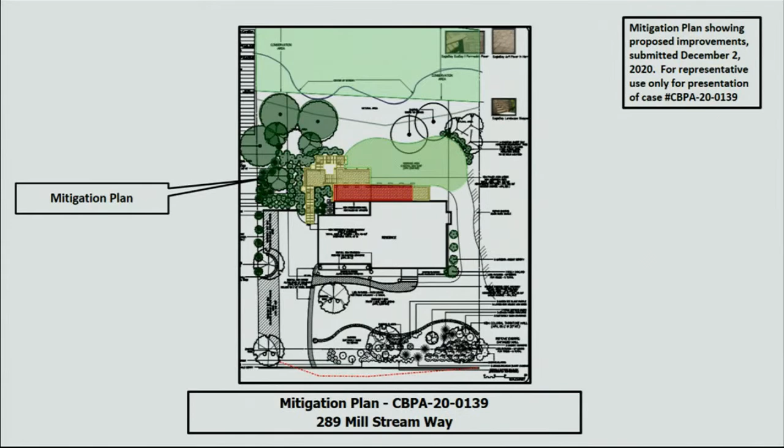Thinking of it in those terms, this is a much better walkway because it's not solid concrete. It's taking the retaining wall out once we were able to stabilize it, because we had to get it under control—it was just raw dirt sitting out there, but it has held in well. We put erosion netting down.

Very good, I appreciate the attention to detail there. We were previously concerned with the extent to which the wall encroached towards the resource itself. I think the stream's a little closer to the rear property, the toe of the slope, I should say. Appreciate the effort there to help minimize that impact.

Any questions for the applicant? Hearing none, thank you very much. Seeing that no one else is in the audience, I will close the public hearing.

Board discussion. I recommend we adopt. Mr. Gussman, Mr. Lukens, any comments? No comments on my part. I have a comment—this is a much better project, and I'm really happy to see that the applicant got the slope stabilized. Thank you for doing that. This project looks much better than the previous one, and I like the plantings plan, looks really good too. So I think I can live with this plan.